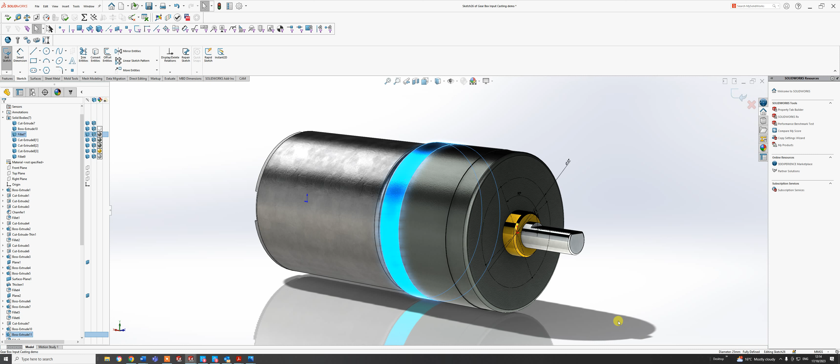Okay, going to go over the gearbox input casting for this video that we started last week. It's basically a matter of putting the holes in, but you've got to be accurate and find the right places. I've updated the 2D drawing, which should be on Moodle, so use that as your guide. But there is a technique here that we need to do.

If you look at the drawing we've given you, you really want to start with concentrating on the drawing on the right hand side, which is actually the back elevation from this direction.

So to do that, if I go over to my history tree here, you'll see if you pull this bar out a little bit, there's a little arrow there. If you click on there, you'll see a load of solid bodies come up, all highlighted, and fillet 7 is actually the one we want to concentrate on at the moment.

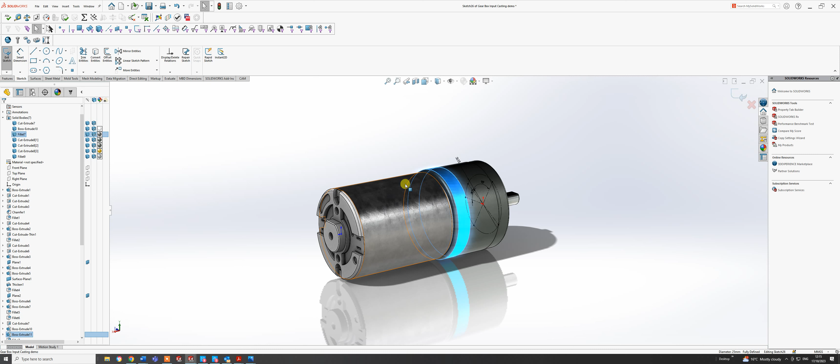So I need to switch off the rest. I'm just going to go through and click those off, and that one there, so I'm just left with that one highlighted. There is a sketch there highlighted as well.

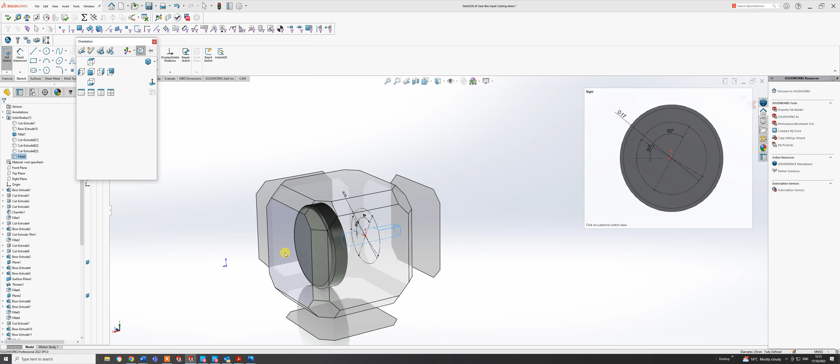I'm going to press the space bar, okay, and I'm going to click on that face there, and that is where we're going to start to do our work.

So that sketch is highlighted. I'm just going to agree to that sketch because it was a previous drawing - you can see it's still there. I'm going to hide it just so it doesn't distract from us.

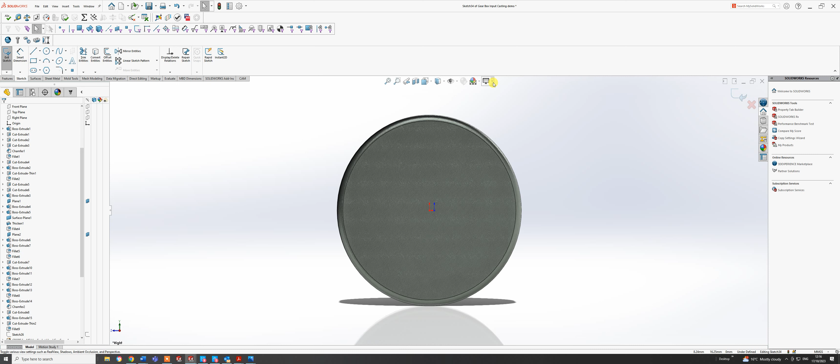So I need to sketch some construction lines in first. Let's go to sketch. I'm going to click on that face there, and I may or may not have... I'm just going to take these off because it actually saves power and also makes it a little bit truer to how we actually want to draw. So I need to find the actual center.

So I'm going to go to center line. I'm going to start at the top here, go all the way down to the bottom, and you'll notice it is black, so I'm fine. I'm going to do the same on the horizontal, so the Z - just to find it, hover over, go all the way across.

Perfect. Now, if you're looking at that right hand view, you can see there's a load of dimensions to actually anchor that there. And on the other view, for the main part of the drawing, that's for the internal part, which is over the other side.

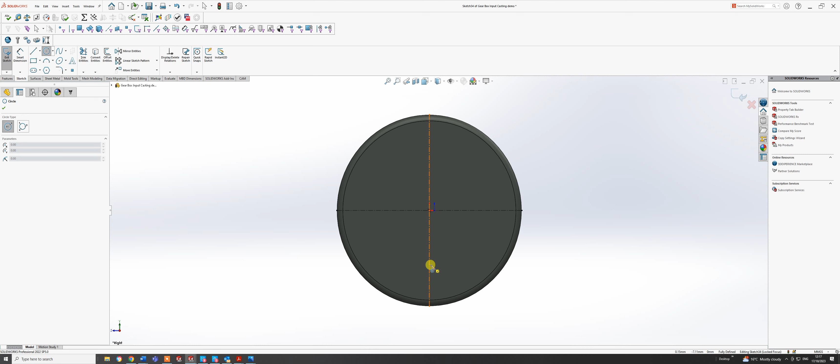So to start with, I'm just going to plot some holes in, the number of holes I need. I'm just going to put in a circle there, I'm going to put a circle there. This is just roughly mapping out, no dimensions at the moment.

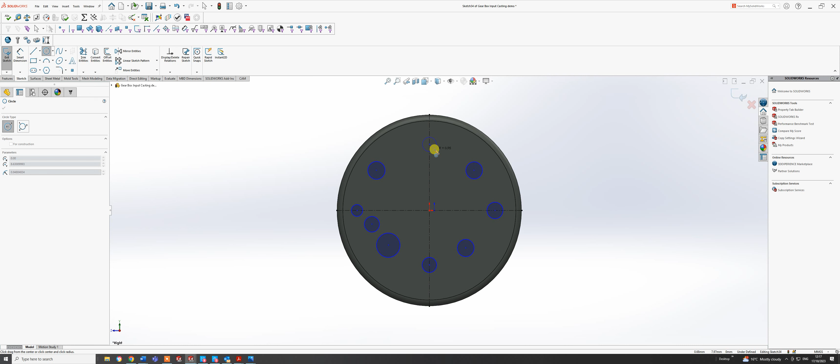Okay, I think there's one about there, definitely one there, and another one over here. So I'm just seeing what all my holes are. There's one about there, one about there, and of course there's two centers. So I've laid out the number of holes that I actually require.

So to start with, what I'm going to do is actually click on that hole and that hole, and I'm going to make those equal - which didn't do on there, so just go over here and do that. Give that a green tick. Okay, I'm going to give them a dimension of 2 millimeters. That's out to there. Oh look, not far off at all. Okay, you'd think I've done this before.

And then I'm going to do a dimension from there to there, come out here, and if you look at the drawing, that should be a distance of 7.5, and it should go black because it's on that center line.

But what I'm going to do now is just click on there again, hold the shift key down, click on that horizontal line, and then click on that center with the shift key still down, and then make those symmetric. Because if you look again, it's another 7.5 up, but I don't need to do that for that one. So that's good, I've done that one.

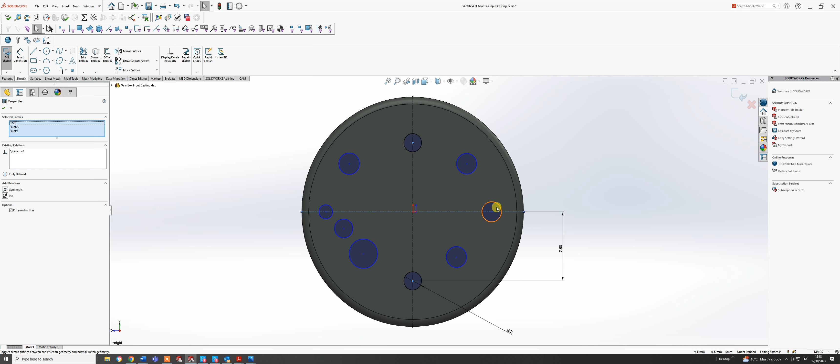I'm going to do these two outer ones now, because again they are equal - they are 8.75. So while I'm in that sort of dimension mood, I'll just put it there and there.

Okay, I'll go up to there and put in 8.75. So that's that there. And if I click the center point of that circle, hold the shift key down, center line,

and then the other line here. And then do symmetric around that area. Then last one, click on there, and click on that one, and then make them equal. And last but not least, go to Smart Dimension, put a dimension on one of them, and the internal diameter of that is 2.5.

Okay, that is a threaded hole I think, but we can come on to that later. So that's those done, I've just got these now to actually look at. I'm going to put a dimension on this one here, which is 3mm, and I'll put a dimension on that one, okay, which is 2.5mm. The distance is 7mm and 6.25.

So if I go from there to that centre line and go up to about there, I'm putting 7, so we're not too far off. I don't know why that's like that, bring that one down. And then from there to there, okay, is 6.25. Okay, so we've now got those in.

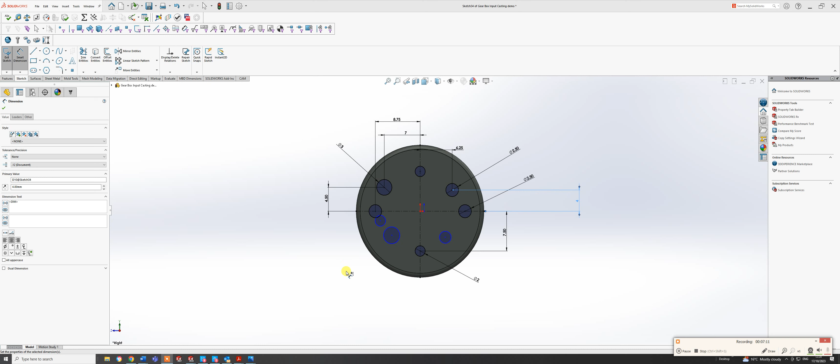So rather than actually do a dimension, I've just pressed escape. Let's just come out of the dimensions and put click on that one there, hold the shift key down and do those ones. Okay, and then just do that equal. So they've gone down to 2.

And then I'll just go to my dimensions while I'm here. Do that one at 2.5. Okay, and right, the distance apart is 3.6. So go from there to there, come down here and put in 3.6.

Okay, I'll do an equals 2 in a minute, and of course I'll do a parallel as well. But I'll go from there to that one there, and that distance there is 4.5. Let's just come back to here, which funny enough is actually the same. Actually it's 3.75, not 4.5, so that one on there, and 3.75, and down we go.

Okay, so we're getting there. So all I need to do now is to put, let's just come out of the dimension there, there, and there, and I'll do that as symmetrical. Okay, and I also need to do, just click away that one, hold the shift key down, and that one as horizontal. Okay, so I've got 3.6.

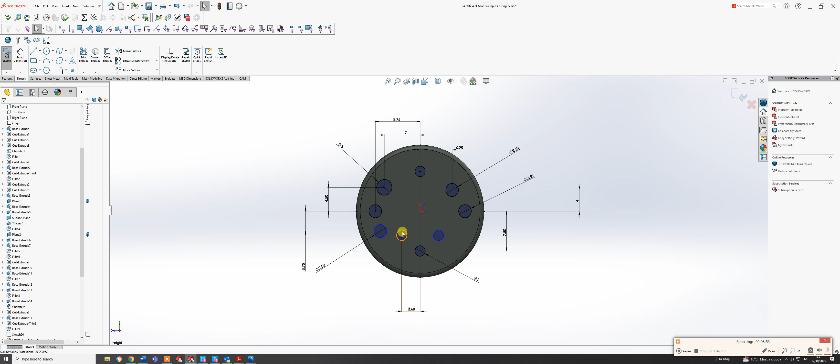I haven't got a height there, have I? So that height from there to there is 7.5. That should be 6.5. So let's just go for another dimension. Go from there to there. Let's do that. Let's just change that to 6.5.

Perfect. Okay, and just pull that out there. Pull that one down there. Pull that there, just to make it tidy so you actually see what's going on. And then this one here, I just need a distance from there to there, which is, put that over there. Distance there, I think is 6.25, so 6.25.

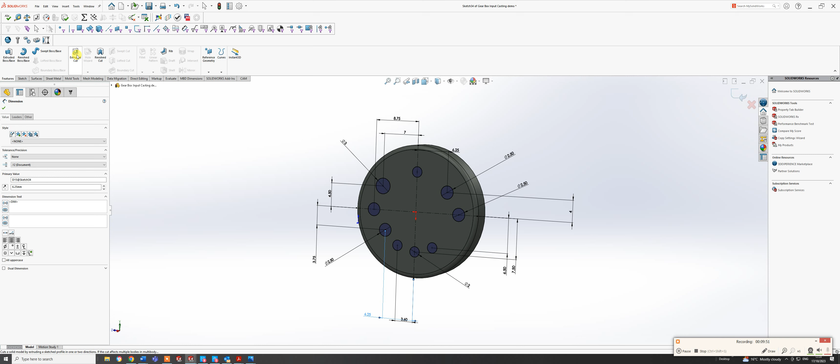Okay, and then we have all my holes set up. I'll just click that down, 3 on there, and I'm going to go to features, and I'm going to go extrude cut, and I'm going to go through all, and blind through all. There we go. There you go. And there I have the sort of back end, the back plate of what I've got.

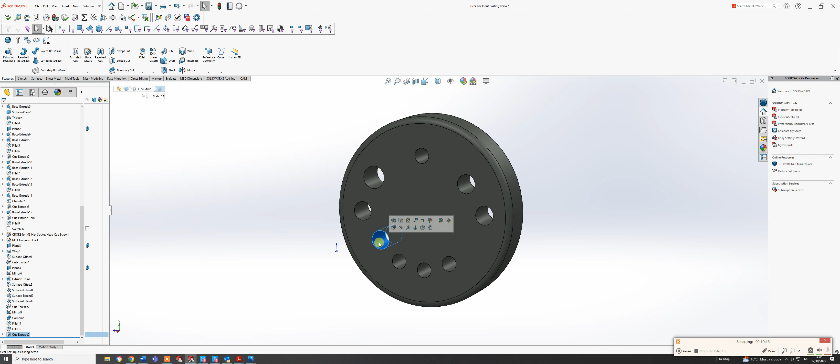What I didn't do there, which I'll go back into, I didn't do the center hole. So let's just click on that there and go to edit sketch, and let's just put another hole in on that center, just pull it out and then put a dimension on it.

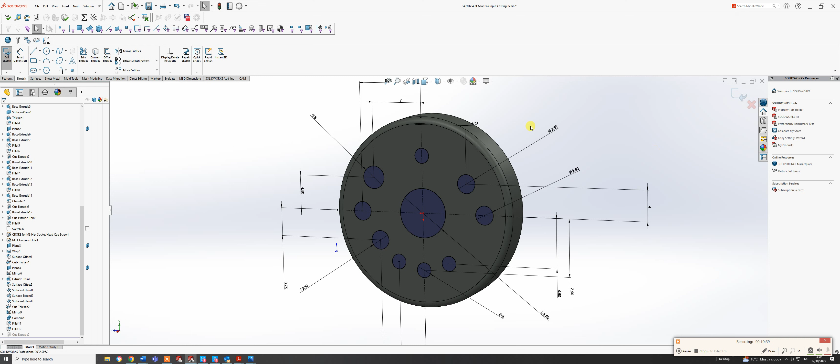And let's have the dimension of that there. Notice there's two, it's the inner one, so it's 6.5. There we go, just give that a green tick, and hopefully it may or may not... let's see, I've gone through as well. Yes, it has. So I've got the holes to set up.

So really, I just need to put a small chamfer on that edge, but we can do that later on. What you'll also notice in your design tree, which I've sort of failed to look at, everything for that is actually there. Now, ideally, I want it at the start of where this was made, so I need to bring that up to underneath there. So what I can do is click on that and just drag it up to, I think it's about there.

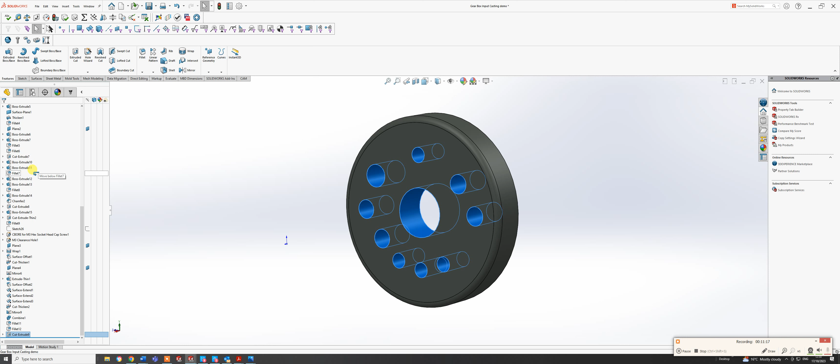We'll find out in a second. I think it's that one there. Let's see what happens now. Just give it a little bit of time. So all that information is now there on that one there. So what I'm going to also do is I'm going to pull that bar up to that point there. Actually, no, it's too far. So I'm going to come down one, and there we go. We've got our history there. So what I'm going to do now is come in and start to hollow this out.

Okay, we now need to concentrate on this side. Sorry if I've paused the video, but sometimes you have to do these things. So if I look at the drawing we've kind of got an internal sketch hollow to kind of carve out.

So if we look at that, the inner diameter is actually, not diameter, radius is 10 millimeters. So I'm going to draw on this face here a circle of 10 millimeters. I'm going to sketch on that surface, and draw a circle out, and then just give that a smart dimension of 20 millimeters, and that's the internal part of that raised bit that you'll see on the drawings I've given you.

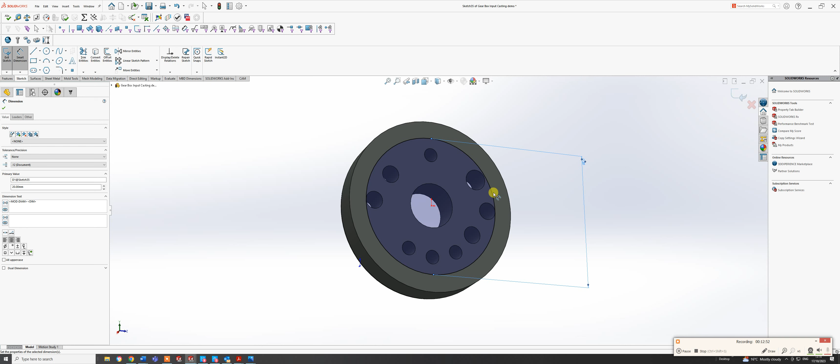So I could then just go in and carve that out, but I want to put those two sort of humpy bits in first. If I just go up to here, my mouse has been a little bit tricky today. I don't know why there's slight distortion there, because I don't have perspective on, but we'll carry on.

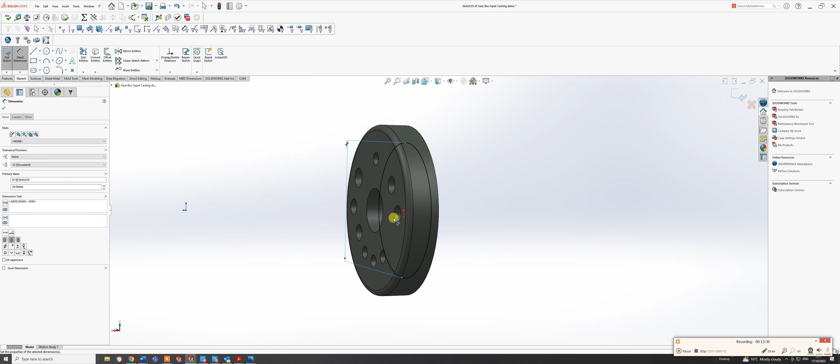So if I look at those there on the internal bit, and this now is the sort of left hand side drawing, let me just escape that so I can turn it around. So there's the back, so that's the one that's closest to the motor, and this is the bit that's going to be hollowed out. So we're looking, and you'll notice that everything is sort of flipped around size wise. So I want to concentrate not on that hole, but on this hole and that hole there.

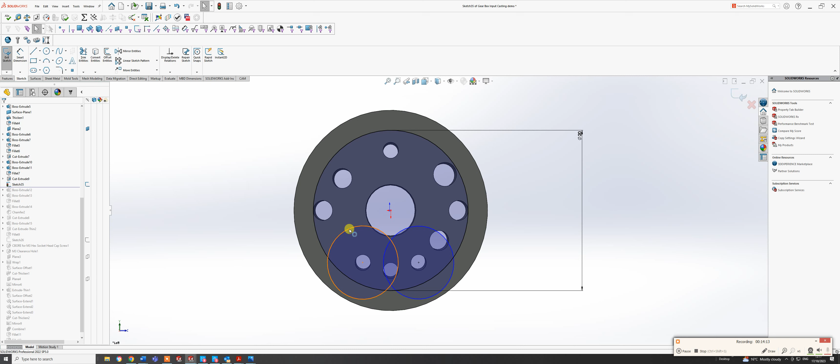So I'm going to do a sketch and do a circle. I want to pick up on the center of that there. I'm just going to pull out a distance, and I'm going to do another one about from that center out to about there. Now these are equal, and so I'm just going to click on one, hold the shift key down, click on the other, and make equal, and then let's put in a diameter.

That's not far off actually. I think it's 9.5, is that right? Let me just put in 4.75 times 2, because I'm so stupid I can't do it in my head. Yes, it's 9.5. I did actually do it in my head.

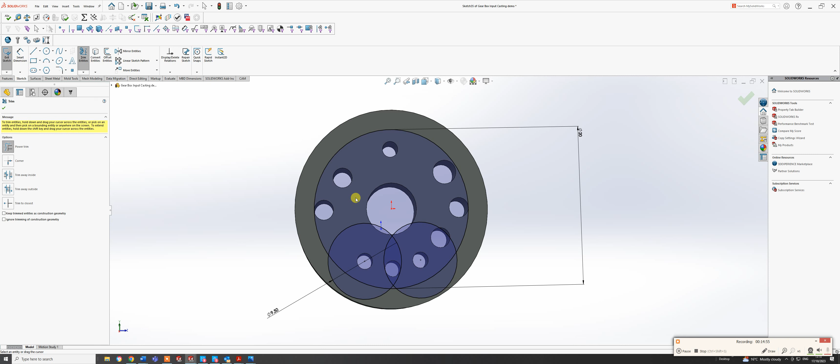Now what we got there, I need to actually trim away parts of that circle, so cut it a bit like a knife. So if we go to trim entities, and I've got my power trim, I just click here, hold the mouse key button down and just drag the line through, and you'll notice that just disappears in bits and pieces, and this should all go blue in a second. There you go, that's all gone blue, and there's a bit there in the middle, so I'm just going to power trim that bit out as well.

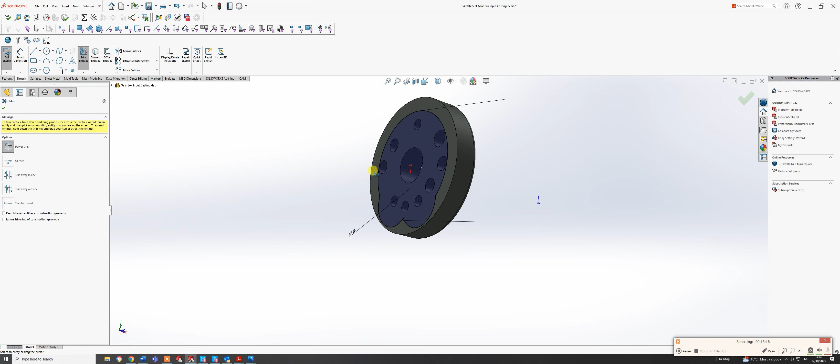I'm not going to put any radiuses on that yet. What I am going to do now is an extrude cut, and I think I'll do an offset this time to show you a different way of doing something. So if I go to features, I go to extrude cut, I want to do that one, but this time I'm going to go offset from surface.

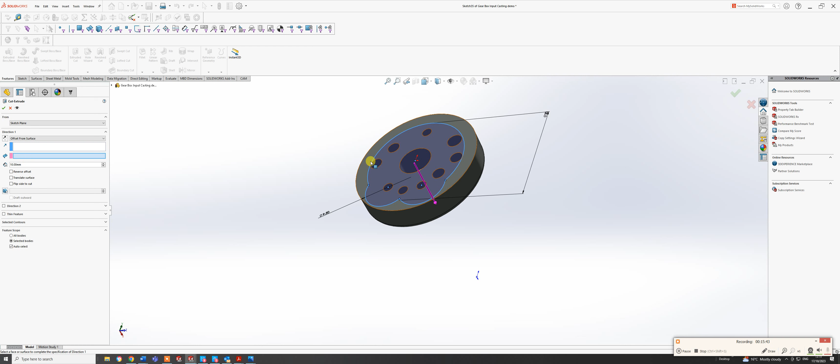I'm going to pick the underside there, and you'll notice there's a figure of 2.5. Let's just see if this does this. I might have to reverse the offset. No, it's done it for me, so that's fine. Give that a green tick, and therefore I've actually just hollowed out the parts that I want to.

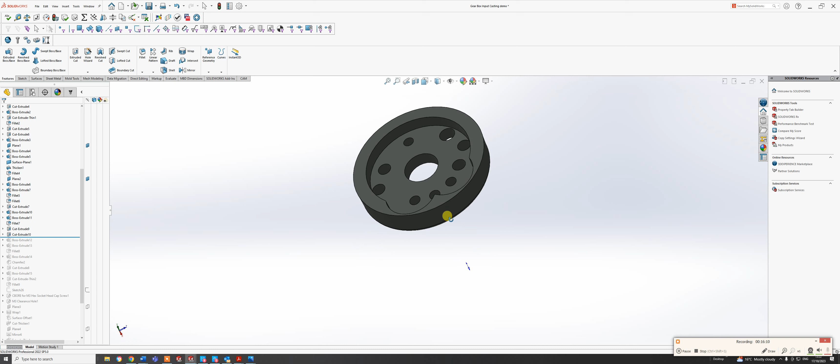So it's starting to come together. I'm now going to do some more circles on here, and then take away to a depth of 1.5 millimeters, you'll see on the drawing. So as I'm looking in here, the circles to do are this center one, the one above, and then there's 4 others out. Let's go into sketch.

I'm just going to do some round ones on that surface, and then pull from the center of that out. That's one. There's the other one down here from the center out. Okay, and I'm going to pull one.

Actually, I've missed a hole, but I can sort that out in a second. Let's do that one there, let's do that one there, and I think it's not that one, but this one here. I've actually made a mistake already, but we can rectify that. That's not a problem.

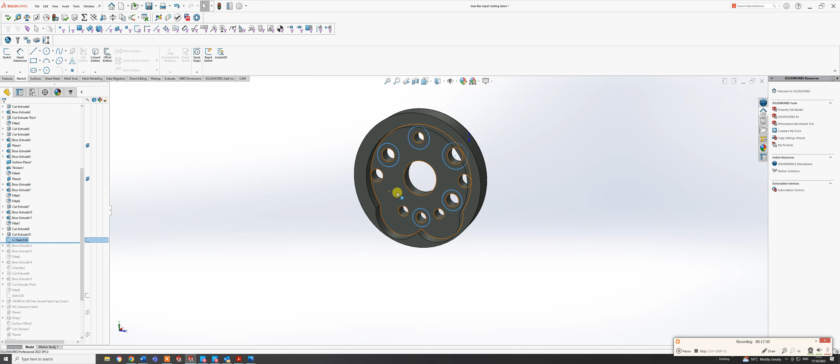So let's just select those, and I'm going to come out of that sketch, leave those sketches in there, and go back into this and edit sketch to see why I am missing one of those holes. Let's just see, where do I want it? It's the sketch there that I'm missing, and that should be a 2.5, not 2.25, it should be a 2.5 hole.

So if I go onto sketch again, let's do one around there. Okay, and it's a 3mm, so let's give it a dimension of 3mm. Okay, and turn that to a 3. And I need to do a dimension from there to there, which should be a depth, actually not marked on my drawing, but I think it will be a 3mm.

I'll have to put that on, so let's just put 3mm. Okay, no, that's 33mm, I don't want that. Let's just double click that, change that back to 3.

Okay, and it is 7.5 from that point there, so from there to the center of that there should be 7.5. Okay, that looks a lot better. Actually not quite right either. We have these problems now and again.

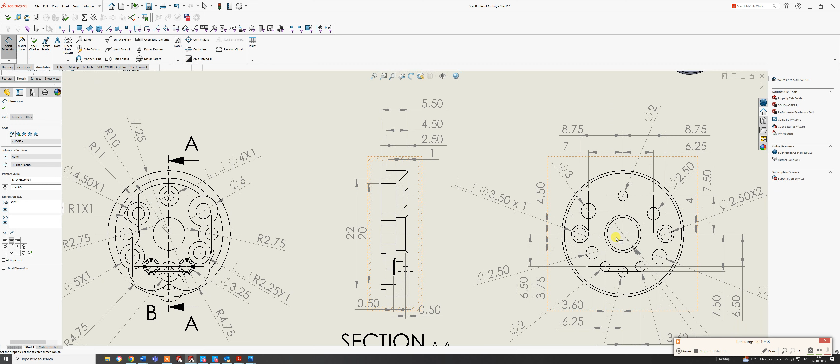This I need to double check. So what I'm going to do, I'm going to cheat slightly. I've already got the drawing up on the screen, so I'm just going to go to Control and Tab, and that will bring me up my drawing. And it's actually, let's have a quick look at it.

Let's just view right in. So it's that point there I need, it's that height from there. So just go to my Smart Dimension, which is already done, click on there, come down to here. Won't do it. Let's do smart dimension again, from there to there. For some reason it's not allowing me to do it.

Let's just press escape. Smart dimension from the center of that point to center of that point. 4.51, that should be 4.5, and I can change that in the box. I can override dimensions, or I can just go to this one here and go to 1 decimal place and give it a green tick, and you'll see it's changed to 4.5.

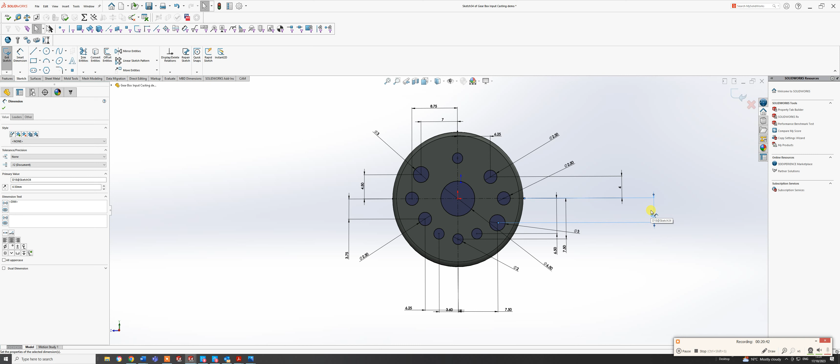So I'm just going to control and tab again to go back to my original drawing, and where that's 3, I'm going to double click on that and change to 4.5. So it's quite easy to go back and make particular changes, and that actually looks a lot better according to the drawing I had originally. So just give that a green tick.

Perfect. Now let's just swivel it round, go back onto these here, and go to edit sketch.

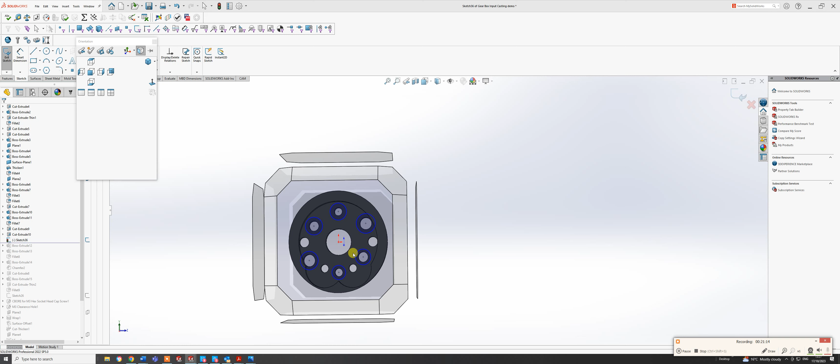Okay, I'm going to draw one more circle, which is the one I've just put in. You can see I've actually got a bit there - that's not the mistake I was looking for, but I'll show you that in a bit. We can add that in. So I've got 6 holes there that need dimensions, and we're going to sink those in by 1 millimeter.

So the bottom 2, the outer radius, is actually a diameter of 4 mil. When I say the bottom 2, I mean these 2 here. So go to smart dimension, pull that out, and put my dimension in of 4. I'll then go up to here and here and press equal. Okay, so that's those 2, it's gone black.

I now want to go smart dimension on this one, and this will be an interesting one to do. Let's pull that out, and that outer diameter is actually 5. I need to actually cut both ways on this one - you'll see why in a second. So I can go back into that. The one on this side is 2.25, so click on there, come out to that one and put in 2.25.

And then I've got the top 2 to do, and that one there is 4.5. And the last one, this one here, is 6 millimeters. So come around to here, do that at 6. Okay, that goes quite large.

So just press the space bar again, and this time instead of that, I'm just going to go normal to the plane. That's better, I've got a better perspective there.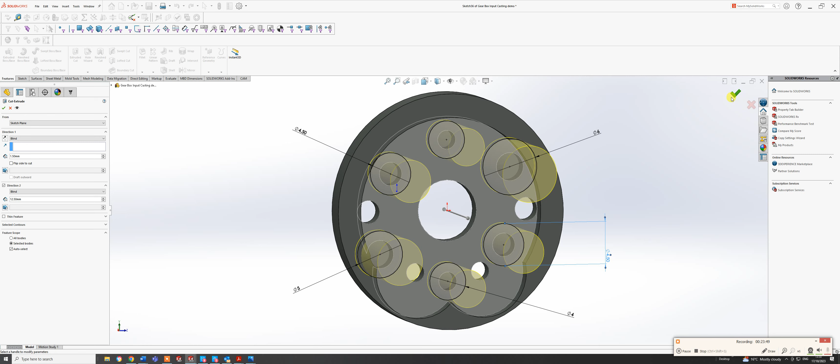Okay, and you can see I'm now starting to build up that profile there, which is great for that. What you may not have noticed, if I just press the space bar again, let's go normal - these 2 here are actually raised and should be filled there, and I made that mistake to start. I didn't really make a mistake, it's just I could have done it in a previous sketch.

So I'm going to go to sketch again, sketch on here, and sketch on that top surface, and do a hole from the center there out. I'm not sure where it goes. We'll see there is a radius mark on it of 2.75, so let's do that slightly bigger.

Let's do the same this side, come out, and do a smart dimension out there. Let's do that, it's a radius of 2.75. So that is 5.5, so 5.5 diameter, so we're not far off. And then press the escape key, let's click that, hold the shift key down, that one, and make those equal, because we know they are.

But you also notice that from what should have been done here, we might have to make slight adjustments. These ones here also need to come out, so I might need to shift this in some way a little bit. So there is a radius we can put in there. There's a little bit of a radius here as well, and that one needs to come up as well.

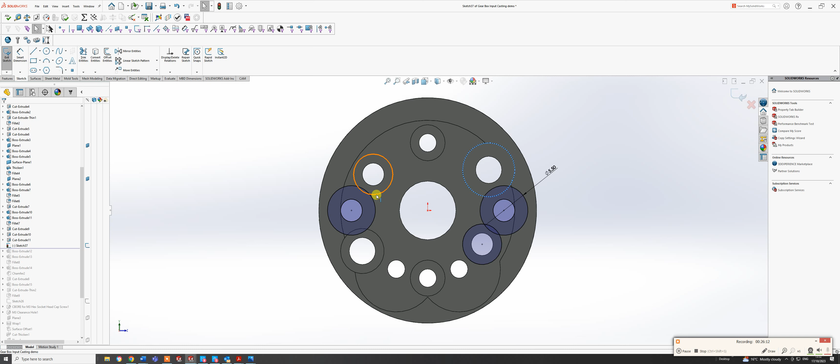Convert entities. Let's do that one, and that one, just to make life a little bit easier. So that one. Convert entities, and try again, convert entities on that one.

Okay, I think we had done that already. We'll see in a minute if that works or not. I'm now just going to go to trim, and let's just see if I can take that out. I think there's a double line there, so I'm just going to take that out again. Just go back to convert entities one more time.

Okay, you might see that that is joined. Let's just try it. Trim entities. Let's just power slide through. Didn't do it, let's try again. Trim entities, power slide through that. Yeah, that's fine. Let's just do the same here.

And that bit there. Now you notice that's gone blue for some reason, but we can go back into that in a second. It's probably because it's lost its center. We'll do the same with that there. Ah, right, that didn't convert.

So Control Z. Let's just go convert entities again. Just take that - that's offset, sorry. So that boundary's closed. Let's just go to convert entities. It's done it, okay. Now go to trim, and just power slide through that bit there. Just power slide through that.

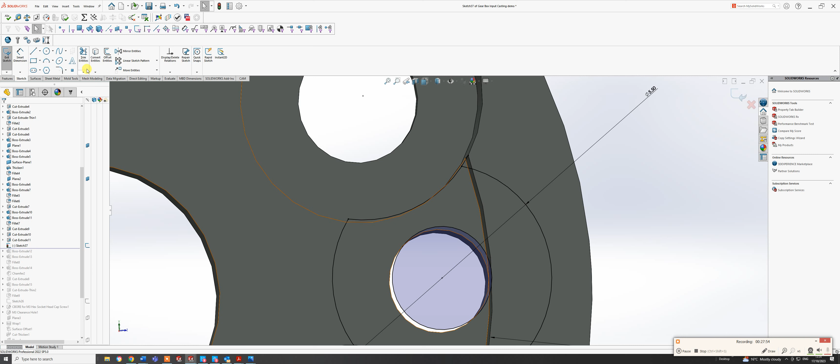Right, I'm going to keep - no, I'm going to take - no, I'm going to keep that. I'm just going to convert entities one more time. Let's just do that one. Right, let's convert entities. You'll see the gist of what I'm going to do here.

Oh, I need to convert onto trim. That may have done the whole face. Let's just go to trim. Let's take just that little bit there out.

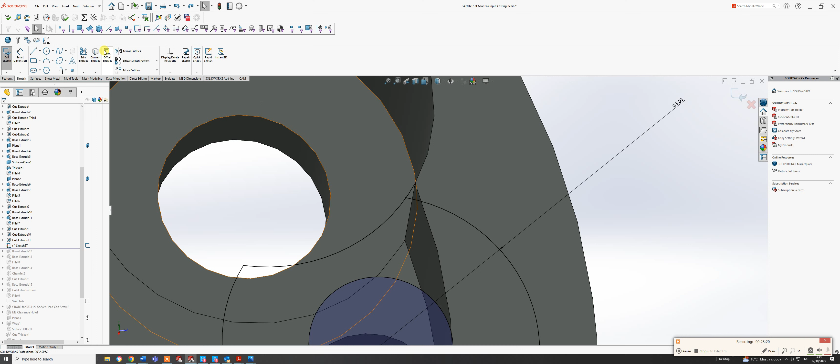It's not really what I want to do. Control Z. Right, let's have a look at this again. It didn't do the conversion that I wanted. So convert entities. Let's just select that one there. Right and click.

Okay, identical curves in sketch are not allowed. Don't know why that's done that. We shall have a look. I was trying to be clever, not being that clever at all. So it's probably because that goes on to that there. So let's just come back to that in a second.

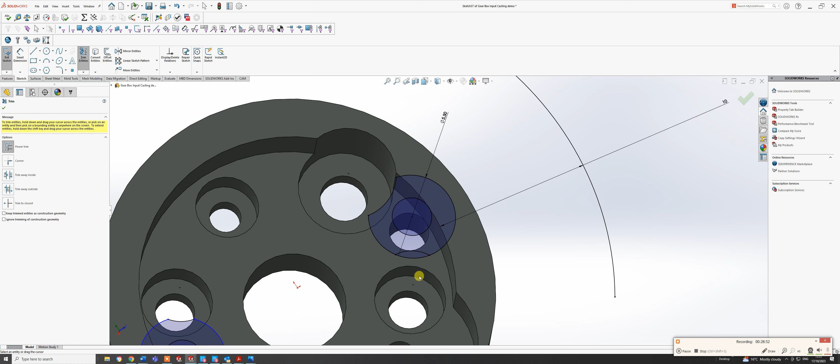So let's just trim that bit out, and let's just trim that and that. So all I need to do now is give a dimension to that one there, even though they were equal. Let's see what that does. 2.75, and we should be good to go.

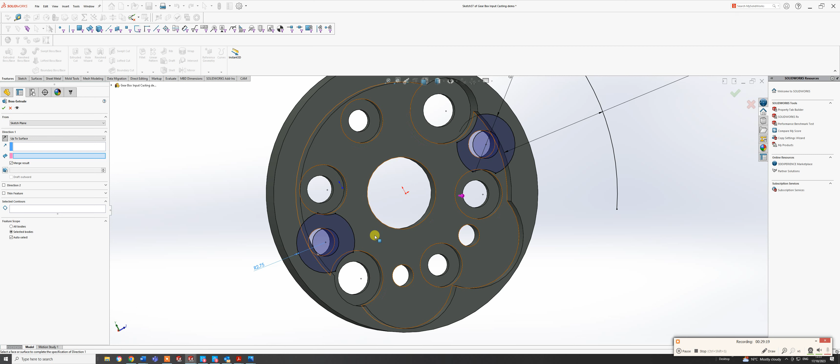Right, all I'm now going to do is go to features and extrude boss base, and rather than blind, I'm just going to do up to next or up to surface. Should be that surface there. I don't have a preview for some reason. Let's have a quick look, see why not. Oh, selected contours, that's why.

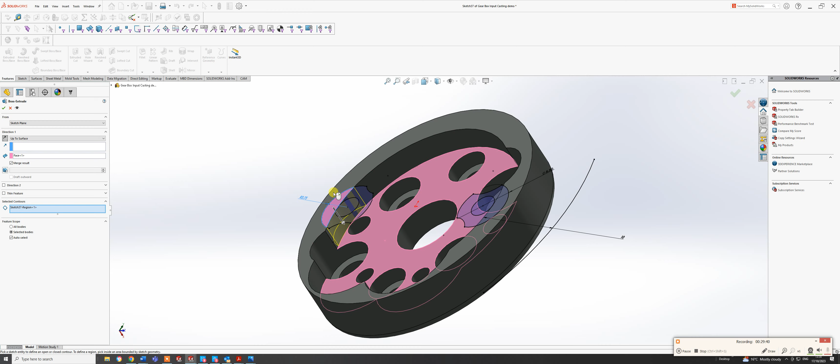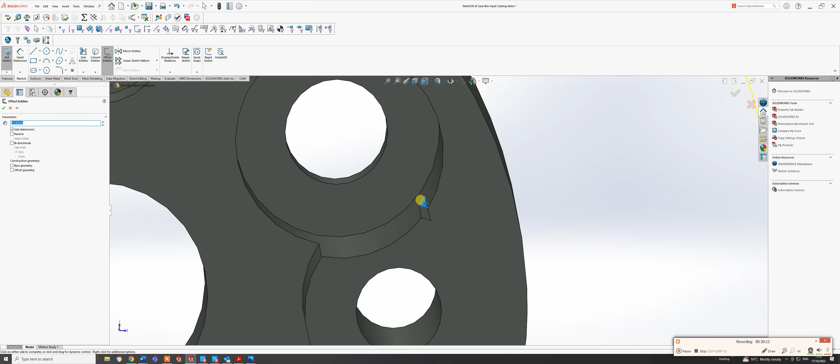So let me just quickly resolve that, and there's one there as well. So just very quickly, all I'm going to do here is go to sketch. I'm going to sketch on that surface, go to convert entities, and click on that face. Okay, you'll notice that should have gone black, but it didn't. So let's Control Z - oh look, right, let's try once more.

Alright, it's done that one now. And let's just try one more. Convert entities, go into that face. Okay, it's done it there. And all I need to do is exactly the same again.

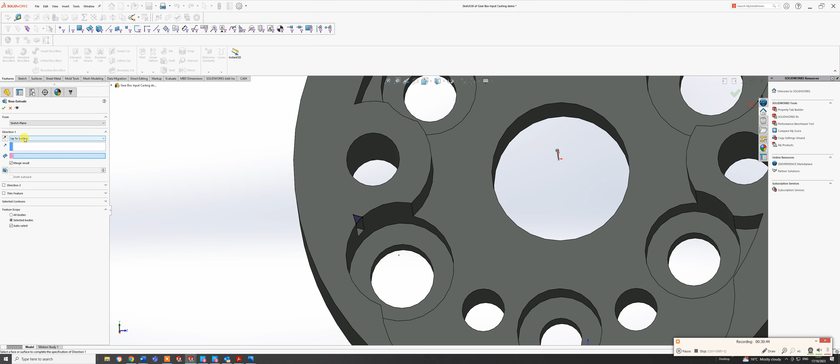Go to features, go to extrude boss base. Okay, and if I just pick those contours, up to surface - so let's click on that surface. You can see it's done it automatically and given it a green tick. So we're happy with that, and you see that's now filled in.

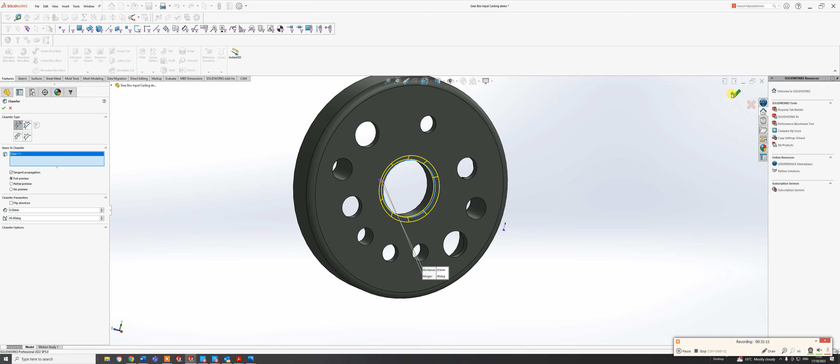So again, I'm going to go to sketch on that face. I'm going to draw a circle out, pick up the centre from there to there, and do the same on that side. There are other ways of doing this, but if you just stick with what I'm doing at the moment, you can then start to experiment afterwards. Do that one and that one as equal.

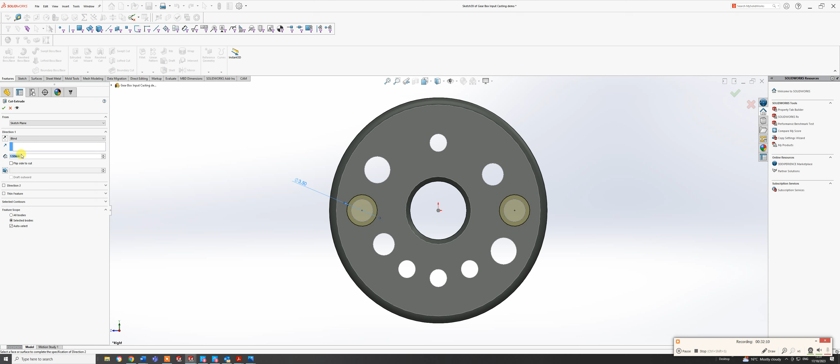And I can do a smart dimension there, as I said, is 3.5. Let's do that at 3.5. Okay, I'm just going to go to features and extrude cut, and that's by 1 millimetre. Oh, cut extrude, do a blind, and then do that as 1 mil. And that should go in the right direction. It is, so there we go.

That's 1 millimetre down, so that's to take some screw heads. Now on this side, I think it's best that I put a little bit of, yes, I'm going to put some chamfers in, some fillets in of 0.2.

That's there, so that's going to be on these little sharp edges here. Okay, let's just do that on there. I might have to come back and change these. I'll do it on that one. That one, I'll do it on that one.

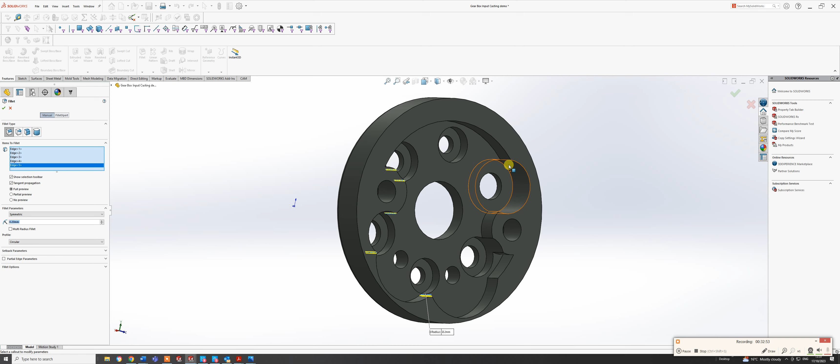These cutouts are where the gears actually rotate. Now I've left those, I've left that internal one and that internal one. So I'm just going to give that a green tick at 0.2, which is fine.

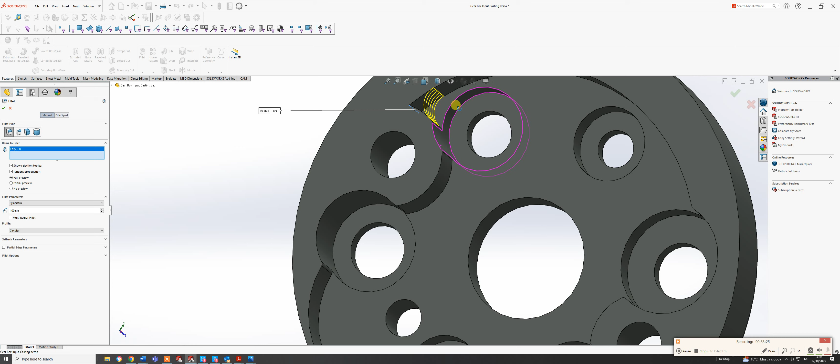And I'm going to go back and do another fillet, but this time at 1 millimetre. Let's do one, let's see what happens with that. And I'm now going to go into that corner. Okay, that might be a little bit too big. No, maybe not, I think that's fine. And I'm going to do the same here. Okay, I think that's going to work out fine.

Now I need to do this little bit here and the other bits to raise up. So press the space bar, go to that face, or normal to viewer selection, and I'm going to sketch.

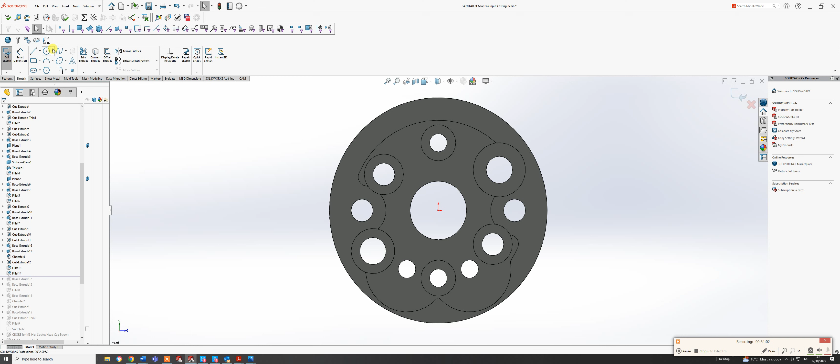Okay, it's the easiest way to do it, and you'll see actually there we may have a slight issue, or maybe not. Actually no, because it stops there, and then we rejoin there.

So I'm now going to go to convert entities, and I'm going to click on that inside one, click on that one there, which is perfect. I'm going to click on that one and that little inside one, and that one, and that very small bit there, and that one.

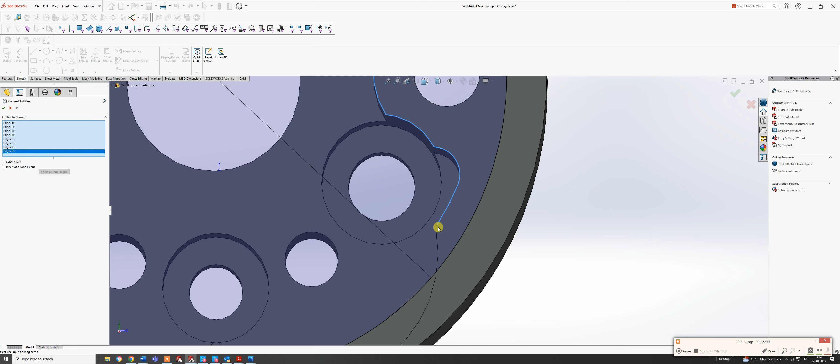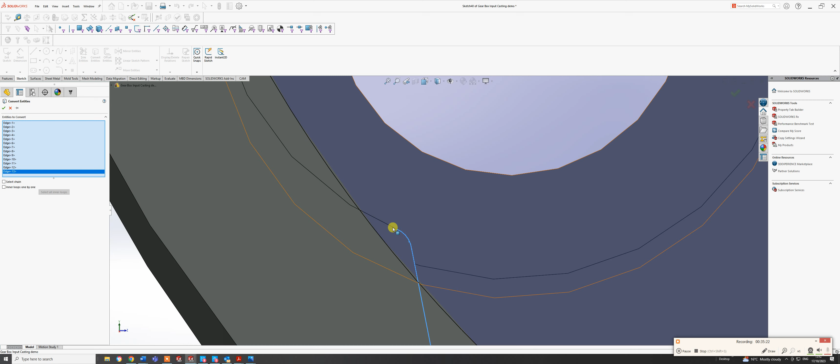I'm sure you can see where this is going, and I want to get that very small bit there, that fillet that was there, and that there, and I might as well just carry on going round doing this here. You'll see why in a second, because we're going to do something there, so just keep going, because we can always take - oh, didn't want the face there, so it's just that there.

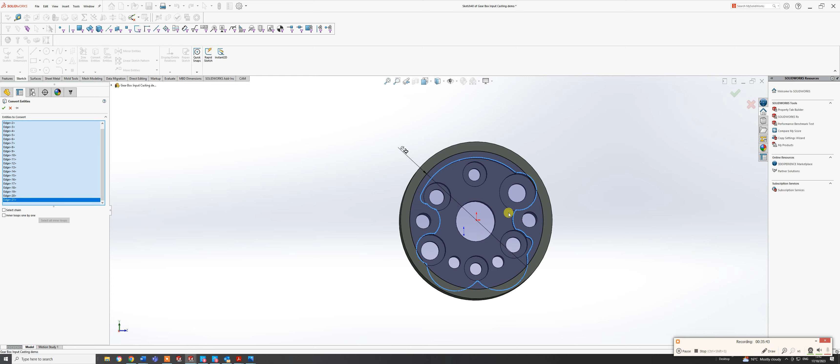And up here you'll see why in a sec. Do that, that, that, that, that. I think it's coming together. Oh, it's just missed one up here, that one there. Okay, so that's what I've done.

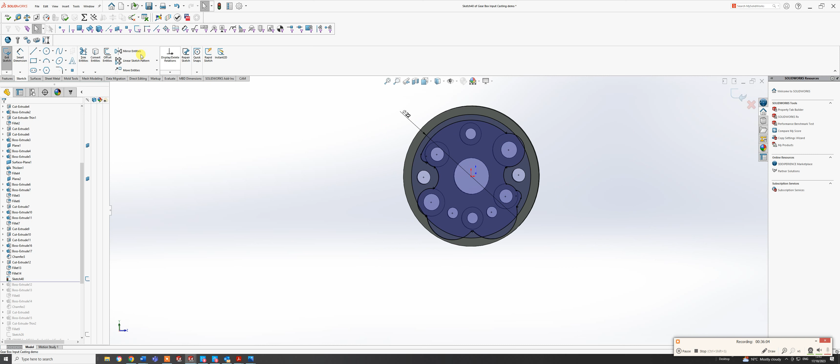So I don't want to convert entities on this, so I've done that. And what I need to do now is actually go and cut away particular bits. You'll see here I've got a slight issue that I don't want to erase, I need to take that away. So let's go to trim entities. I don't want that to overlap that and that. I want that there, I don't want that bit there, if it's there we see.

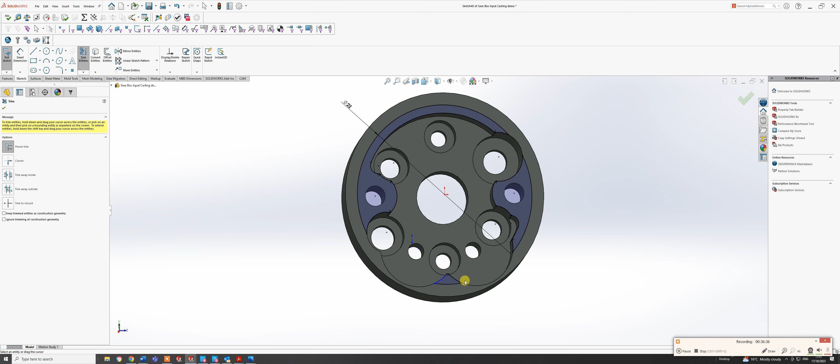Now I don't want that bit there, but I want that centre bit, not that one either. So you can see where I've done that. I don't know why that's there - we might have to dimension that. If I press the space bar, let's have a quick look. Let's give that a dimension, smart dimension, just to make it go black.

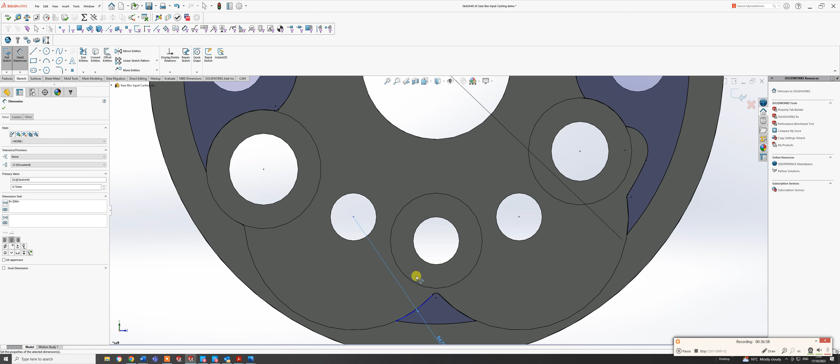Green tick. No, it doesn't do that. So why is that not constrained? Let's just have a quick look, see if I can pick this up. Yes, okay, so that needs to be coincident to that. And we've gone black, okay fine.

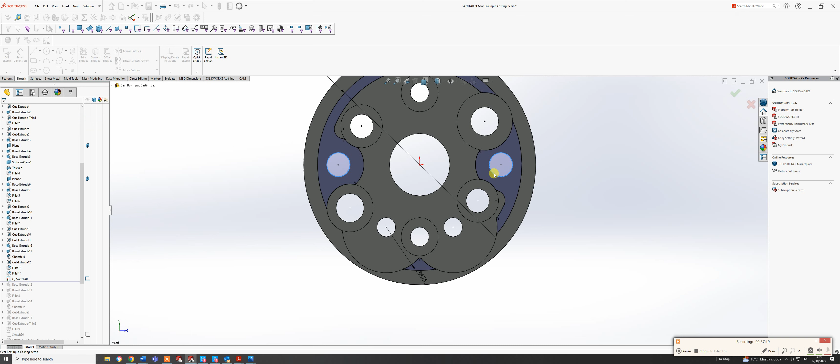So I'm going to also convert these entities here, that and that, and I'm going to fillet it. How much am I going to fillet it by? I think it's 0.2 again. Let's go to feature - not feature this time, let's go to sketch fillet this time - and let's do a 0.2.

And let's just do that on that one, and that one, that one, and that one, that one, and that one. And let's do that one, and that one, and that one, and that one. And the last one, that one, and that one. Okay, so I've got sketch fillets.

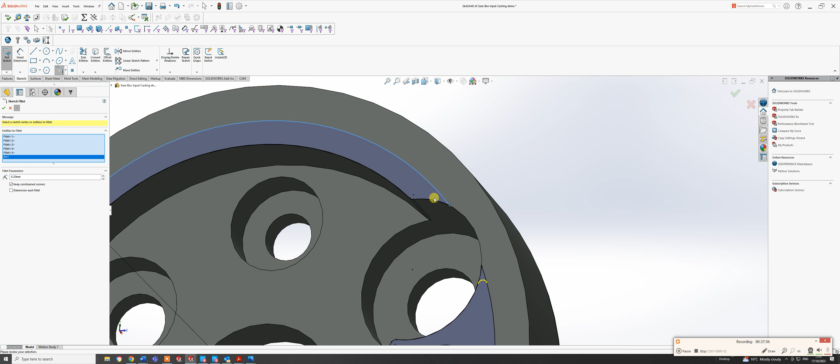So all I need to do now is extrude that up by 1 millimeter. I go to features, actually I have to come out of sketch fillet first, go to extrude boss base. Okay, and it's already automatically thought what we were doing here, so it's done that. So I just need to give that a green tick. Okay, and we're done - so we have that raised parts section, that's the inside.

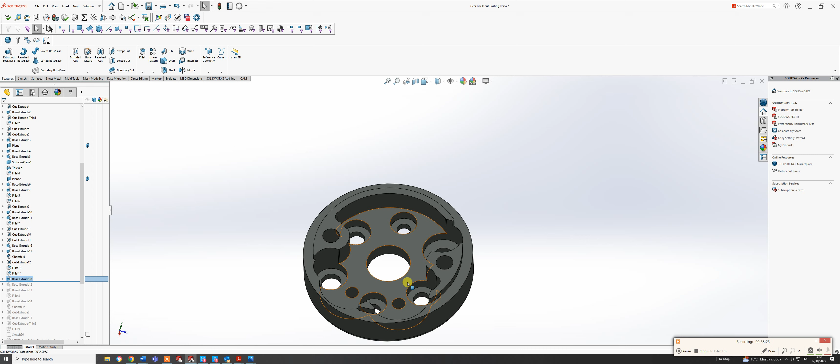The only other thing we've got to do is the raised parts here and here, and then we're good to move on to the next part.

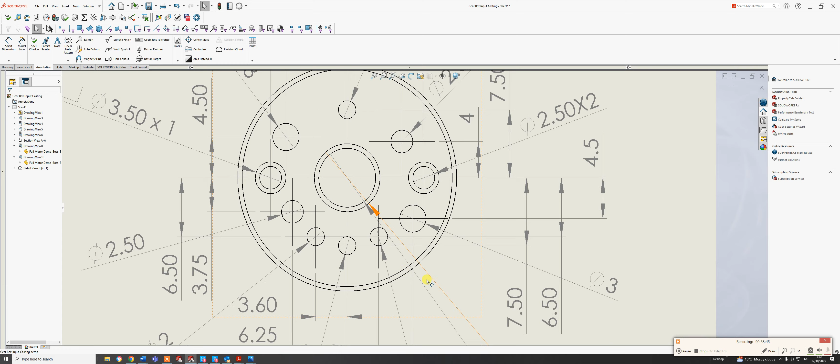Okay, we've just got to do these little internal bits. I'm just going to flip to the drawing again on this side, because what I hadn't done for you, well I had done actually 3.25 for the outer. So if I just flip back again - that's Control and Tab - just go to that one. There we go. So it's these two areas here.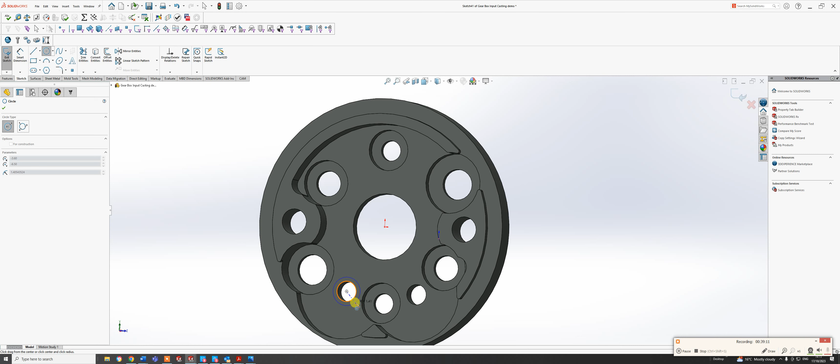So just go to Sketch, Sketch, and on that face, draw a circle out, centre there. I think it's 3, and from there to about there. Let's just do these as equal - hold the Shift key down - make equal.

Okay, and then do a smart dimension, which I think, as I said, was 3.25. Okay, and I'm just going to convert entities again, which is that inside one and that inside one. Okay, and then features, extrude boss base - I think this time we're at a height of 0.5. Okay, and that should be 0.5.

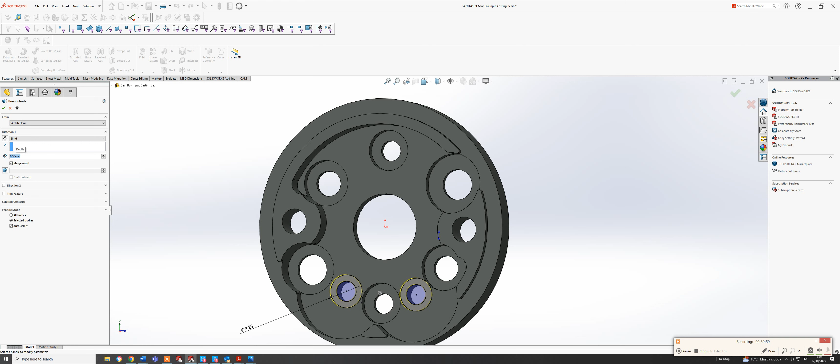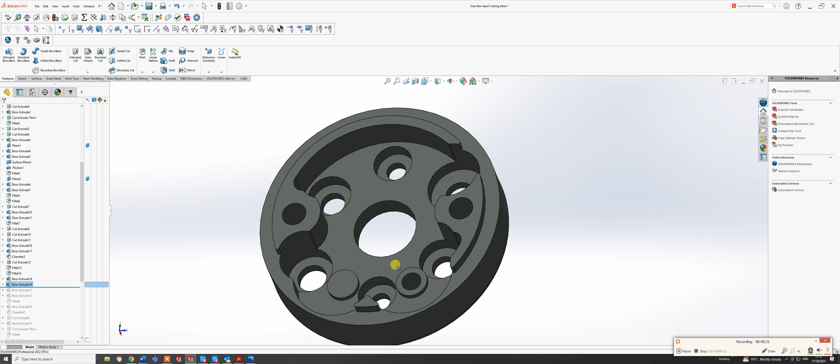Okay, and it should be - let's just go selected contours, that should be that bit, and that bit there. Let's see, I didn't pick that one up, let's try that again. There we go, and let's see what we got. Yep, we've got a selection there. Ah, it didn't pick up on that center circle, so let's just go back in.

Let's go right hand click, edit sketch - no, sorry, it shouldn't be edit sketch, it should be edit features. So I can just right hand click over there, go to edit features. Okay, where it says selected contour, let's just clear those, clear selection. Do that one and that one, and hopefully, yes, that's done it there.

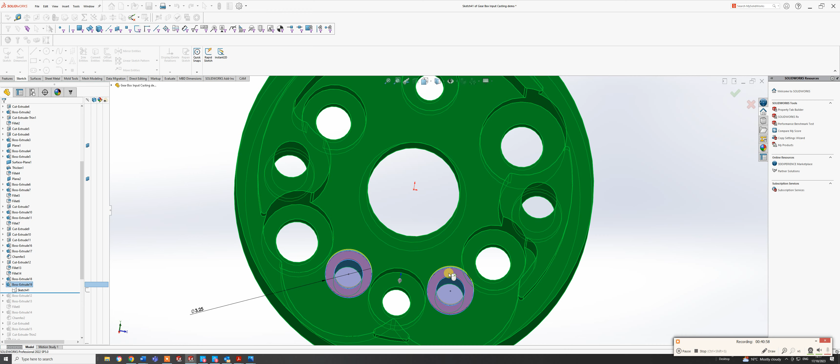The last thing is just to put in a very small fillet, and I think that was 0.2.

Arthur, what are you eating? Let me just see what that dog of mine has got there.

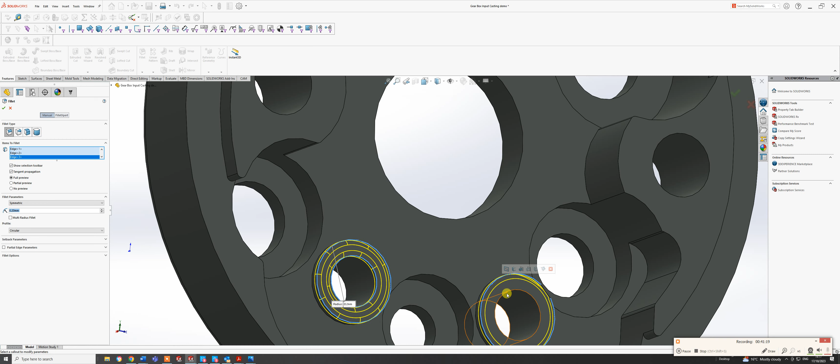So I think that is it for this phase. That's everything there. So I can now start to work on the next part, which I'll go on to in the next video. I'm just going to pull the history tree back down just to show you everything that's there.

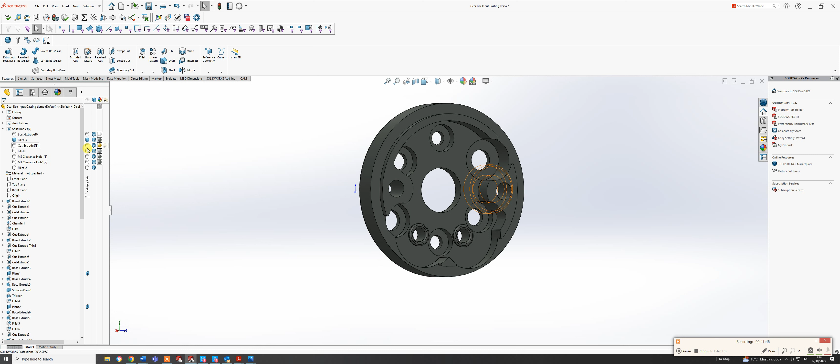Go up to here, and let's just come down. Let's just put in that there, and this is the next part we're actually going to work on there. If I just go to the cross section tool, you can see we've got that there, and we've just got to do all the bits here to make that work. So that will be in the next video.